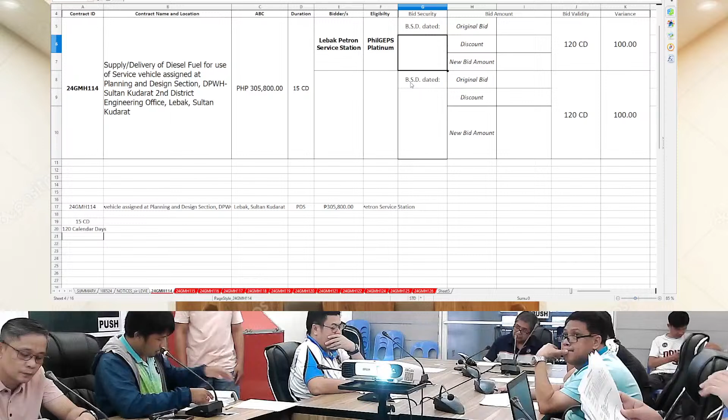Opening the technical component of Lebak Petron Service Station for contract ID number 24GMH114. The documents are: project registration platinum, attached and valid; certificate of registration, attached and valid; DTI, attached and valid; business permit, attached and valid; tax clearance certificate, attached and valid; list of ongoing projects, attached and signed; SLCC, attached and signed; bid securing declaration, dated October 23, 2024, sealed and signed; technical specification, attached and signed; delivery schedule, attached and signed; after sales service reports, attached and signed; omnibus statement, 10 items, sealed and signed; NFCC, attached and signed; audited financial statement, attached and signed.

The technical documents of Lebak Petron Service Station for ID 24GMH114 is... Let's now open the financial component of Lebak Petron Service Station for contract ID number 24GMH114. The documents are: bid form, attached and signed; bill of quantities, attached and signed. Bid amount: 305,000 pesos only. Bid amount: 305,000 pesos only. No discount offered, validity of 120 days.

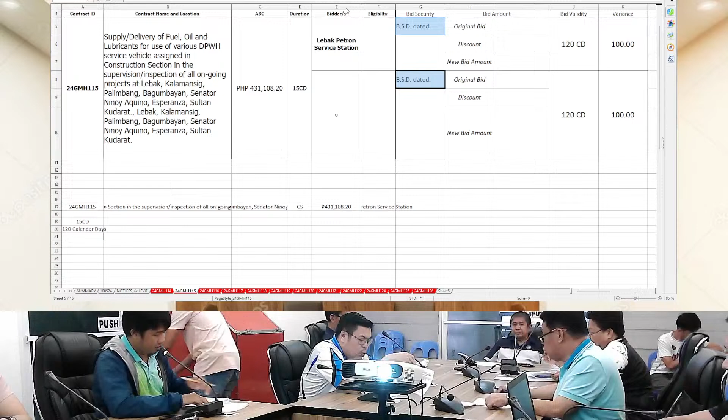Let's now open the documents of Lebak Petron Service Station for contract ID number 24GMH115. The documents are project registration Platinum, attached and valid, certificate of registration, attached and valid, DTI, attached and valid, business permit, attached and valid, tax clearance certificate, attached and valid.

List of ongoing projects, attached and signed. SLCC, attached and signed. Bid securing declaration dated October 23, 2024, attached, sealed and signed. Technical specification, attached and signed. Delivery schedule, attached and signed. After sales service, attached and signed.

Omnibus statement, 10 items, sealed and signed. NFCC, attached and signed. Audited financial statement, attached and signed. Technical documents of Lebak Petron Service Station, contract ID 24GMH115, checklist of tasks.

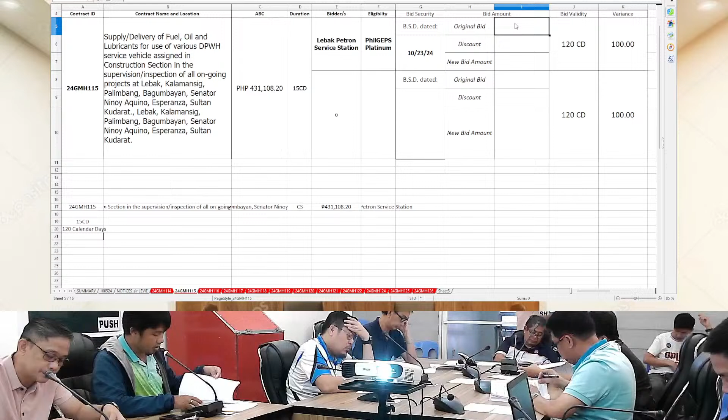Let's now open the financial component of Lebak Petron Service Station for contract ID number 24GMH115. The documents are bid form, attached and signed, and bill of quantities, attached and signed. Bid amount 430,070 pesos only. No discount offered, validity of 120 days.

For the next contract, we have also a lone bidder. Opening the documents, CBC Square Builders for contract ID number 24GMH116. The documents are project registration, Platinum, attached and valid.

SEC, attached and valid. Business permit, attached and valid. Tax clearance certificate, attached and valid. Certificate of registration, attached and valid. SLCC, attached and valid. List of ongoing projects, attached and valid.

Bid securing declaration dated October 23, 2024, sealed and signed. Technical specification, attached and signed. Delivery schedule, attached and signed. Manpower requirements, attached and signed. After sales service, attached and signed.

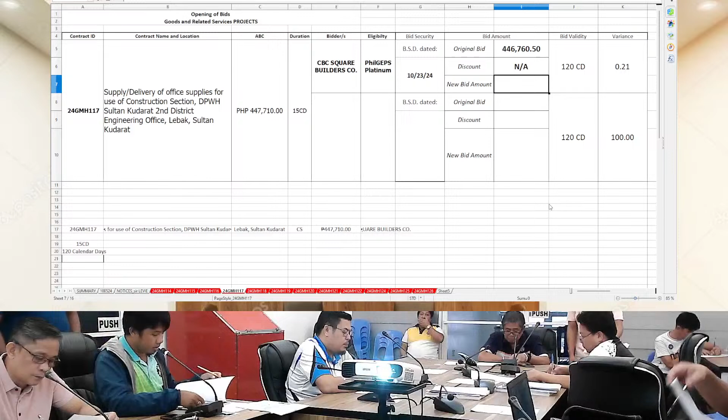Next contract. So we have the technical component of JV Constech for contract ID number 24GMH118. The documents are project registration, Platinum, attached and valid. DTI, attached and valid. Certificate of registration, attached and valid.

Mayor's permit, attached and valid. Tax clearance certificate, attached and valid. List of ongoing projects, attached and signed. SLCC, attached and signed. Bid securing declaration dated October 23, 2024, sealed and signed.

Technical specification, attached and signed. Delivery schedule, attached and signed. After sales service reports, attached and signed. Omnibus statement, 10 items, sealed and signed.

Audited financial statement, attached and duly signed, and NFCC, attached and signed. Technical documents of JV Constech for contract ID 24GMH118, checklist of tasks.

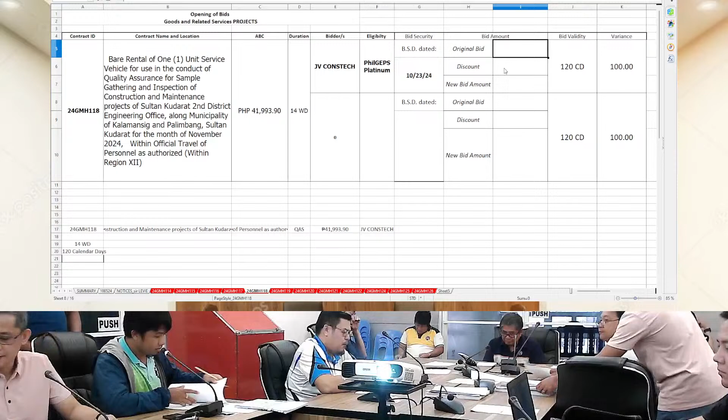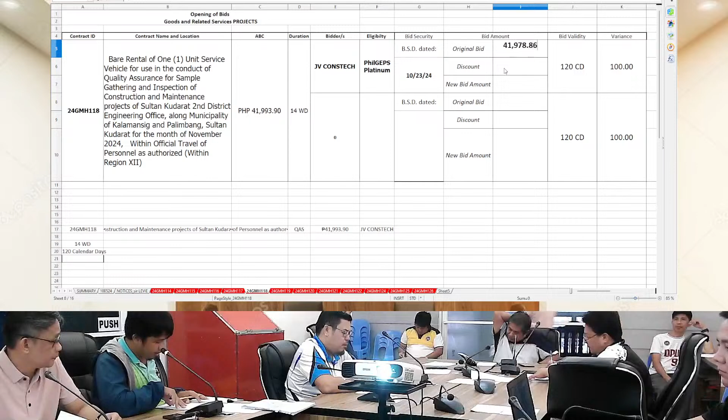Let's now proceed with the financial component of JV Constech for contract ID number 24GMH118. The documents are bid form, attached and signed, bill of quantities, attached and signed, detailed estimates, attached and signed, and cash flow, attached and signed. Bid amount 41,978 pesos and 86 centavos only. No discount offered, validity of 120 days.

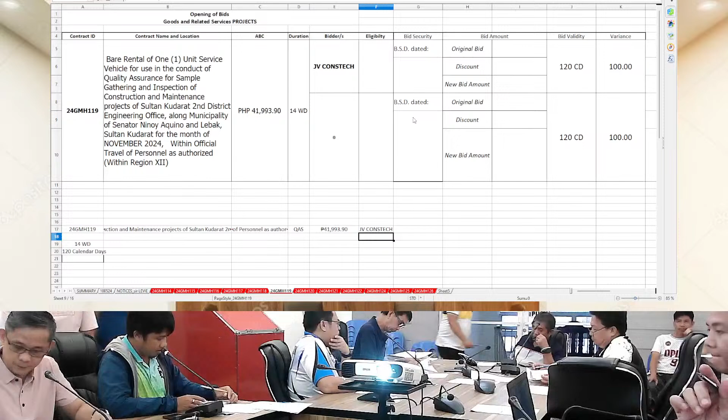Next contract. Opening the technical component of JV Constech for contract ID number 24GMH119. The documents are project registration, Platinum, attached and valid. DTI, attached and valid. Certificate of registration, attached and valid. Mayor's permit, attached and valid. Tax clearance certificate, attached and valid.

List of ongoing projects, attached and signed. SLCC, attached and signed. Bid securing declaration dated October 23, 2024, sealed and signed. Technical specification, attached and signed. Schedule of requirements, attached and signed. Delivery schedule, attached and signed.

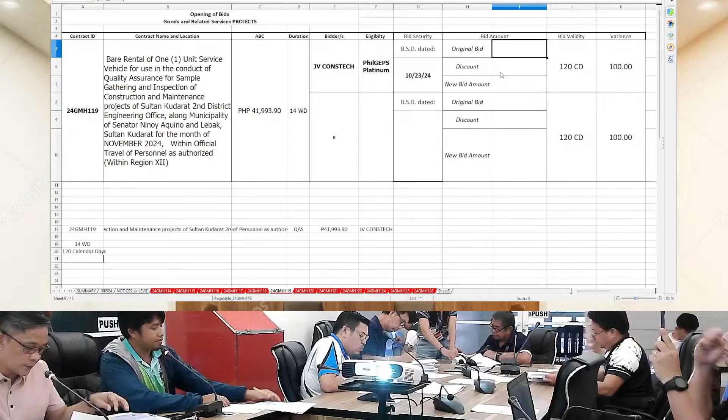After sales service parts, attached and signed. Omnibus statement, 10 items, sealed and signed. Audited financial statement, attached and to be signed, and NFCC, attached and signed. Technical documents of JV Constech for contract ID 24JMH119, checklist of tasks.

Let's now proceed with the financial component of JV Constech for project number 24JMH119. The documents are bid form, attached and signed. Bill of quantities, attached and signed. Detailed estimates, attached and signed, and cash flow, attached and signed.

Bid amount 41,975 pesos and 50 centavos only. No discount offered, validity of 120 days.

Next contract: the technical component of JV CONSTECH for contract ID 24GMH120. The documents are: PhilGEPS registration, Platinum, attached and valid. DTI, attached and valid. Certificate of registration, attached and valid. Mayor's permit, attached and valid. Tax clearance certificate, attached and valid. List of ongoing projects, attached and signed. SLCC, attached and signed. Bid security declaration, dated October 23, 2024, sealed and signed.

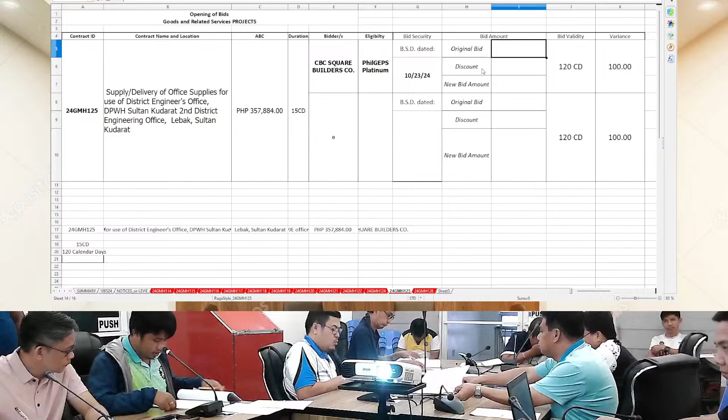For the next contract, we have CBC Square Builders for contract ID 24GMH125. The documents are: PhilGEPS registration, Platinum, attached and valid. SEC, attached and signed. Business permit, attached and valid. Tax clearance certificate, attached and valid. Certificate of registration, attached and signed. List of ongoing projects, attached and signed. SLCC, attached and signed. Bid securing declaration dated October 23, 2024, sealed and signed. Technical specification, attached and signed. Delivery schedule, attached and signed. Manpower requirements, attached and signed. After sales service, attached and signed. Omnibus sworn statement, 10 items, sealed and signed. Audited financial statement, attached and duly signed, NFCC, attached and signed.

The technical documents of CBC Square Builders Corporation for contract ID 24GMH125, as per checklist, pass. Let's continue with the financial component of CBC Square Builders for contract ID 24GMH125. The documents are bid form, attached and signed, and bill of quantities, attached and signed. Bid amount: 357,044 pesos only. No discount offer, validity of 120 days.

For the next contract, we have a lone bidder, CBC Square Builders, for contract ID 24GMH126. DEO procurement: PhilGEPS registration, Platinum, attached and valid. SEC, attached and valid. Business permit, attached and valid. Tax clearance certificate, attached and valid. Certificate of registration, attached and valid. List of ongoing projects, attached and valid. SLCC, attached and valid.

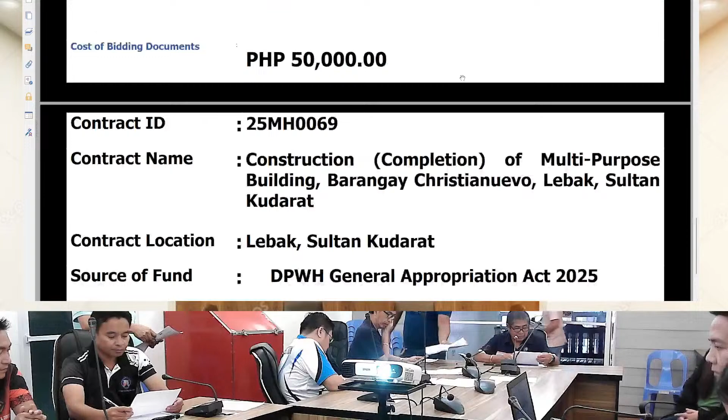Good morning, my fellow workers in the government, as well as our attendees of this pre-bid conference. Today we will be having our pre-bid conference on 3 projects: contract ID 25MH0013, contract ID 25MH0025, and contract ID 25MH0069. These are road widening, construction of riverbank, and completion of multi-purpose building.

So, shall we read the attendance no more? No, we shall now start immediately with the presenter. I will now introduce our presenter from the planning and design section, Engineer Sarah Jean Makasinding and Engineer Winilin Ramuran. So ma'am, please proceed to present this pre-bid conference for these projects.

Thank you and good morning. Sir Assistant District Engineer, Sir David Trabado, Sir Hashri, Sir Boyan, Sir Dong, and to the back members, staff, and to our viewers, good morning. By the way, I'm Engineer Sarah Jane P. Makasinding, and I will be presenting to you the MPB projects.

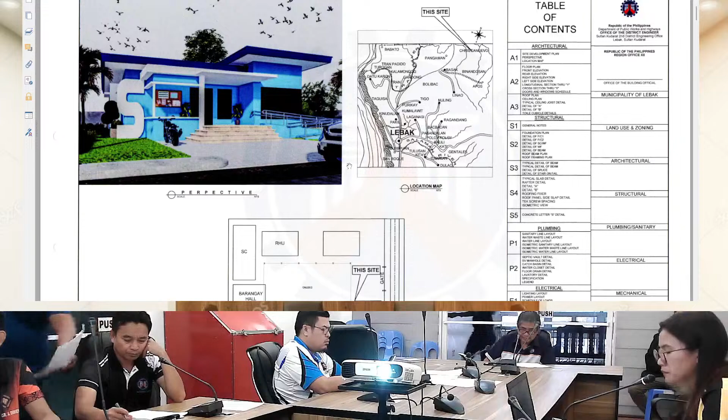With the contract ID 25MH0069, construction completion of multi-purpose building, Barangay Christianuevo, Lebak, Sultan Kudarat, with an ABC of 2,970,000 with a duration of 90 calendar days. This project is a one-story building intended for the SK building.

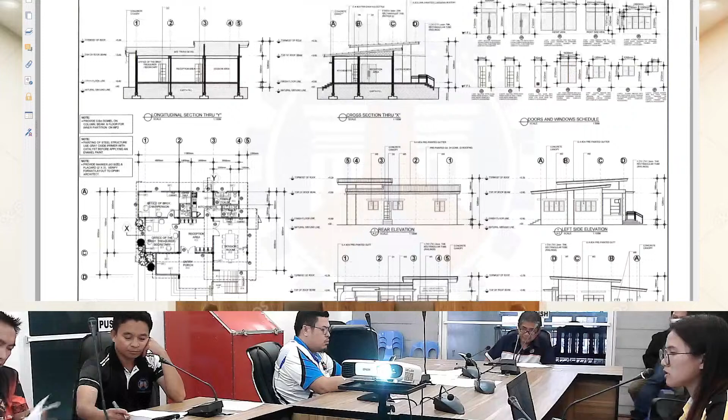For the second page, we have here the perspective view, the location map, and the site development plan of the project. Next, we have here the floor plan, elevations and section elevation, and the detail of doors and windows of the project.

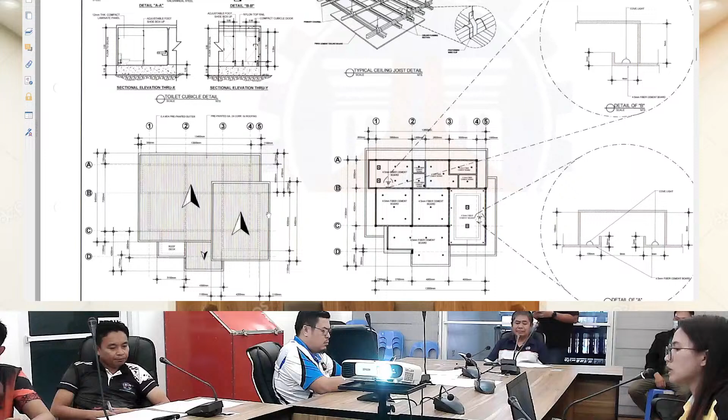This building is 11.8 meters by 9.5 meters. Next, we have the roof plan, the ceiling plan, and the spot detail of the toilet cubicle, spot detail or typical ceiling joist, and the detail of the ceilings. Next, we have the general construction notes for our guidance.

For this page, we have here the foundation plan, the detail of the footing to column, the roof framing plan, and the roof beam plan, together with each section's details and descriptions. Next, we have here the typical detail of our beam, the splice details of our C-purlins and angle bars, and the detail of stair-on fill.

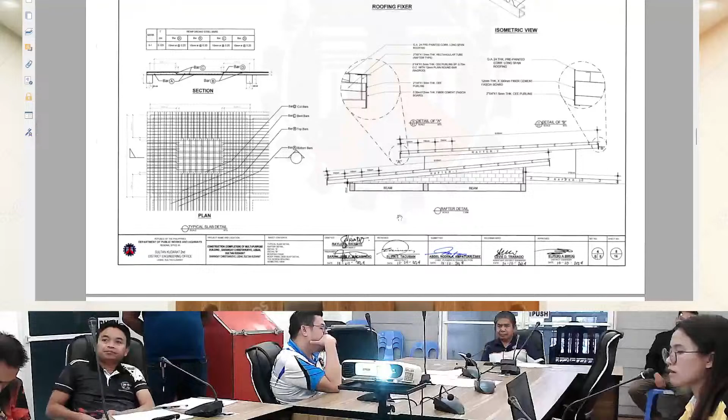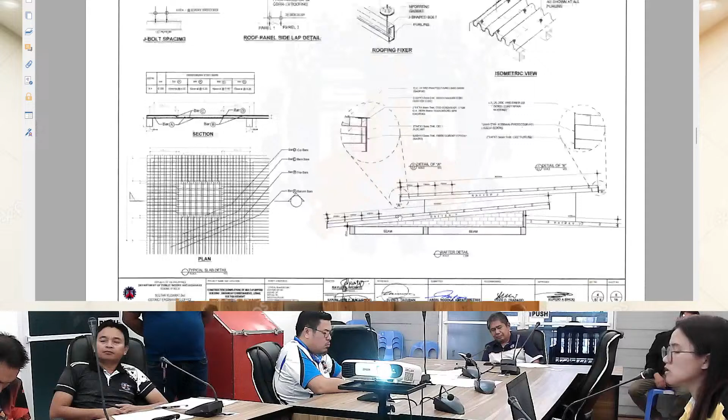Next, we have the typical detail of our slab, and the rafter detail of our roofing, and its spot details for the connections. Next, we have here the detail of our signage. This is a concrete signage here.

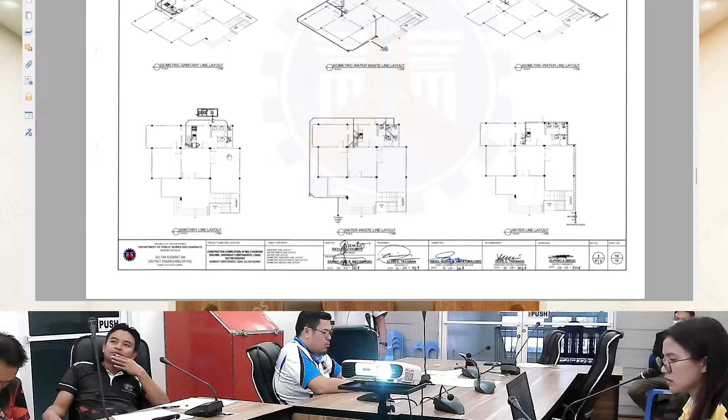Next, we have here the plumbing. For plumbing works, we have here the sanitary, water, and its isometric views.

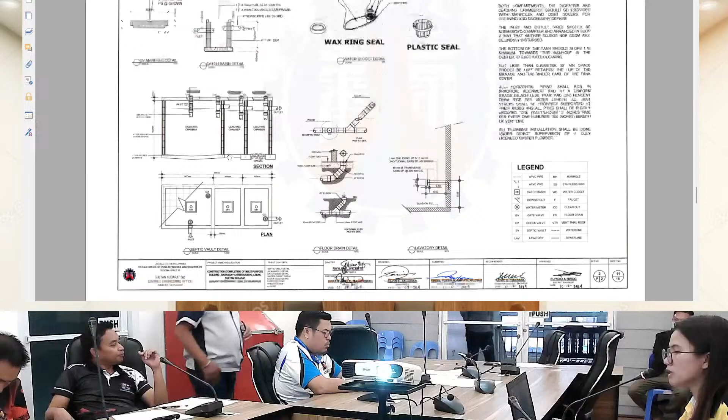For this page, we have the detail of our septic vault, catch basin, and the spot details of the connections of pipelines from vertical to horizontal, and the detail of our lavatory.

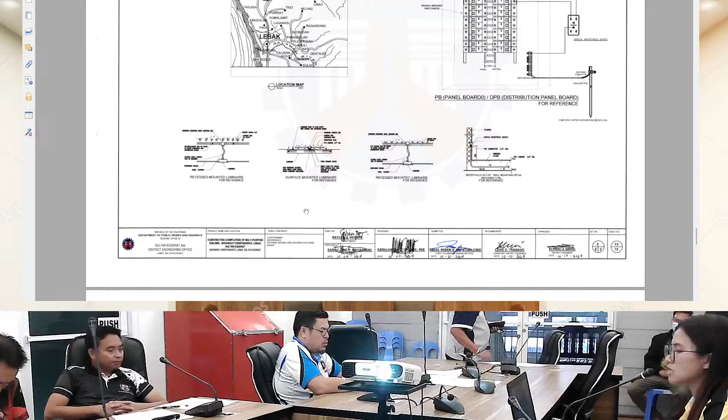Next, for electrical works, we have here the power and lighting layout, the panel diagram, electrical riser and its schedules. We also have here the details for our outlets and lighting for references.

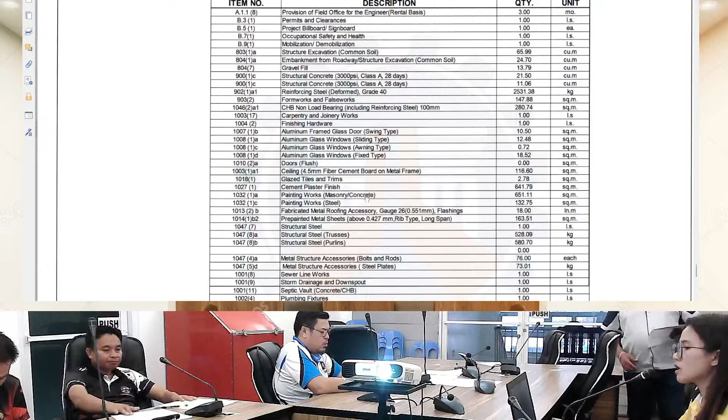For the summary of quantities, we have the provision of field office for the engineers, permits and clearances, project billboard/signboard, occupational safety and health, mobilization and demobilization, structure excavation, common soil, embankment from roadways/structure excavation, gravel fill, structural concrete, reinforcing steel grade 40, formworks and falseworks, CHB including reinforcing steel 100 mm thick.

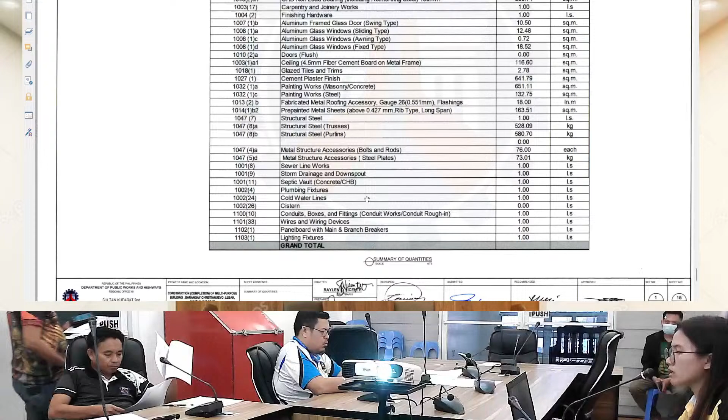Carpentry and joinery works, finishing hardware, aluminum frame glass door, swing type, aluminum glass windows, sliding, awning, and fixed type. We also have doors, which is flush, ceiling, glazed tiles, cement plaster finish, painting works for masonry/concrete.

And for steel, we also have here the fabricated metal roofing accessories, flashings, and pre-painted metal sheets, rib type, long span, structural steel, trusses, and purlins.

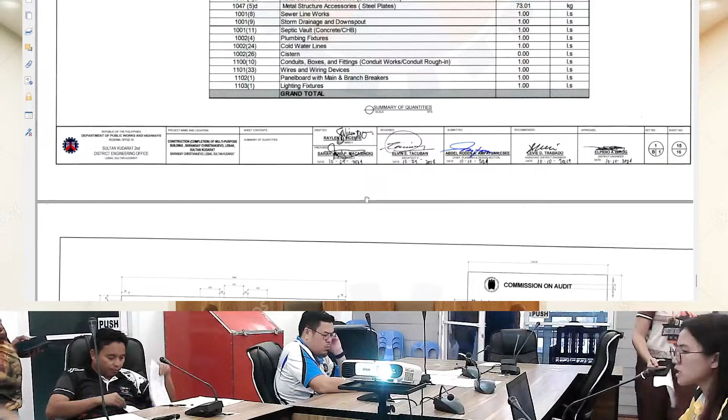And for metal structure accessories, we have here bolts and rods and steel plates. For plumbing works, we have sewer line works, storm drainage and downspout, septic vault, plumbing fixtures, and cold water lines.

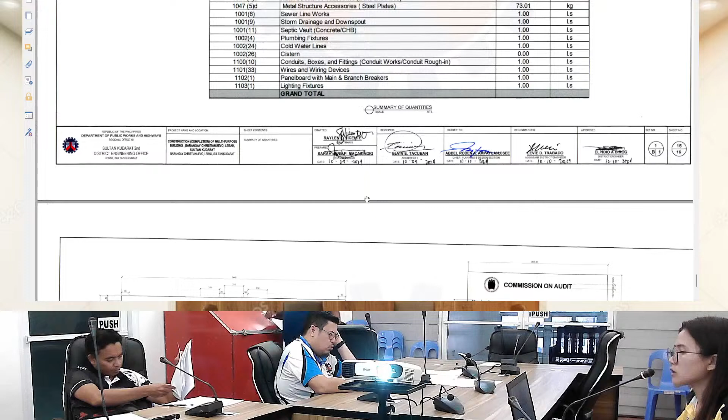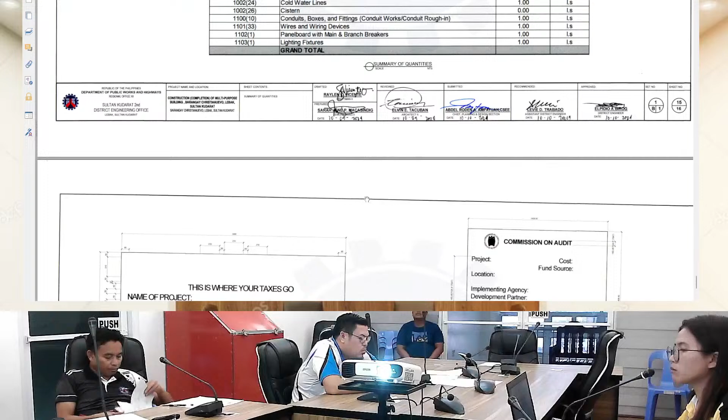For electricals, we have here conduits, boxes and fittings, wires and wiring devices, panel boards with main and branch breakers, and lighting fixtures. And lastly, we have here the project billboard for DPWH and COA.

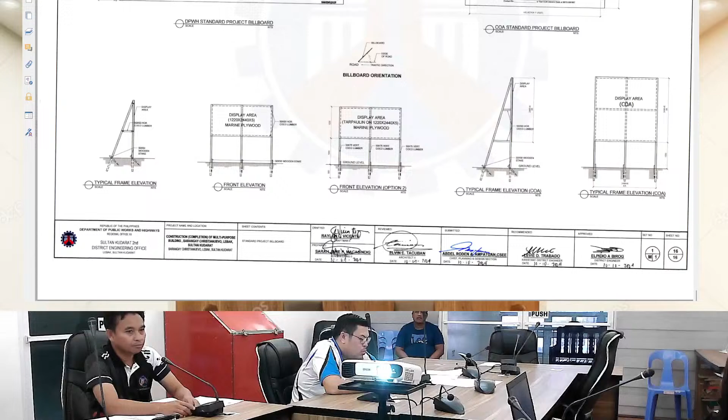I will be presenting contract ID 25MH0013 with the contract name Road Widening, Awang Upi, Lebak, Kalamansig, Palimbang, Sarangani Road, kilometer 1918 plus negative 590 to kilometer 1918 plus 00.

The location of this project will be in Lebak, Sultan Kudarat with the ABC amount of 21,606,060, and we have the duration of 121 calendar days.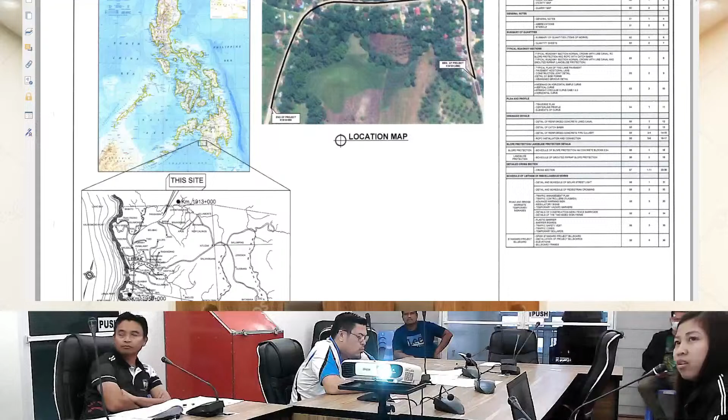Next would be the location map and the table of contents, the general index of this project. So here we can see what is contained in our project, as it is paginated here.

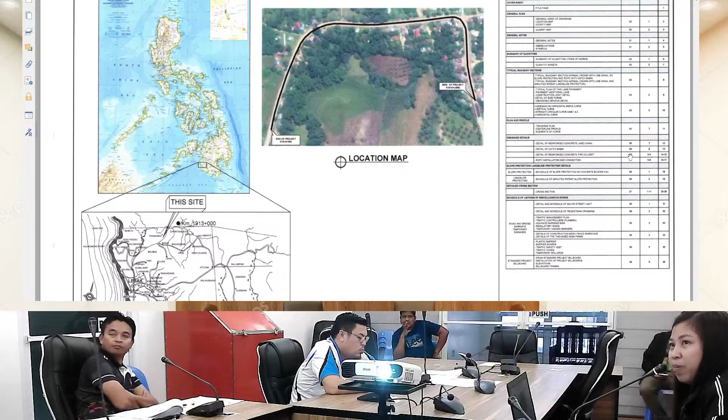So page 2. Next would be the quarry map, general notes, abbreviations and symbols. And on the next page, we have summary of quantities.

In our earthworks, we have clearing and grubbing, 0.40 hectare. Removal of actual structures/obstruction. PCCP unreinforced, 0.15 thick, we have 560 square meters.

Removal of structures/obstruction, concrete, we have 98 cubic meters. Unsuitable excavation, we have 3,776.67 cubic meters. Structure excavation, common soil, we have 620.30 cubic meters.

Embankment from borrow common soil, we have 228.45 cubic meters. Subgrade preparation, common material, we have 5,133 square meters. Our item 200, we have aggregate subbase course, 1,351.10 cubic meters.

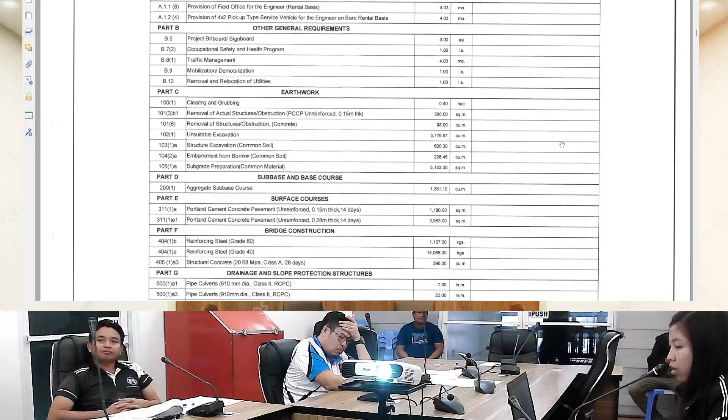In item 311(1)a, Portland Cement Concrete Pavement Unreinforced 0.15 thick, 14 days, we have 1,180 square meters. And for our Portland Cement Concrete Pavement Unreinforced 0.28 thick, 14 days, we have 3,953 square meters.

Our item 404(1)b, reinforcing steel grade 60, we have 1,137 kilograms. Item 404(1)a, reinforcing steel grade 40, we have 15,066 kilograms. Our structural concrete, we have 396 cubic meters.

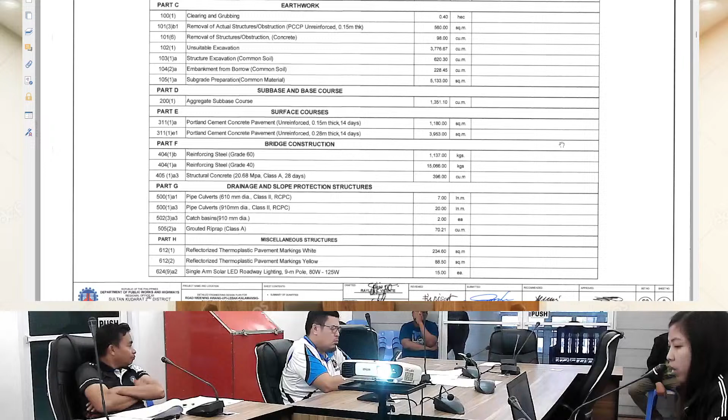For our drainage and slope protections, we have pipe culverts, 610 mm diameter, class 2 RCPC, 7 linear meters. pipe culverts, 910 mm diameter, class 2 RCPC, 20 linear meters.

Catch basin with 910 mm diameter, we have 2. And for our grouted riprap, we have 70.21 cubic meters.

And for the miscellaneous structures, we have reflectorized thermoplastic pavement markings, white, 234.60 square meters. Reflectorized thermoplastic pavement markings, yellow, we have 88.50 square meters.

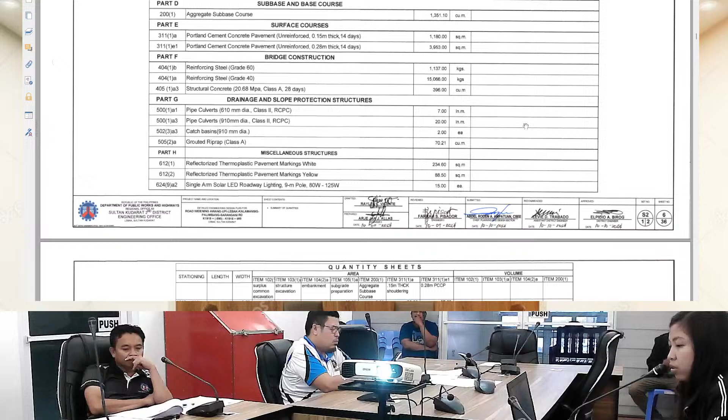And for our single arm solar LED roadway lighting, 9 meter pole, 80 watts to 125 watts, we have 15. Next page would be the quantity sheet.

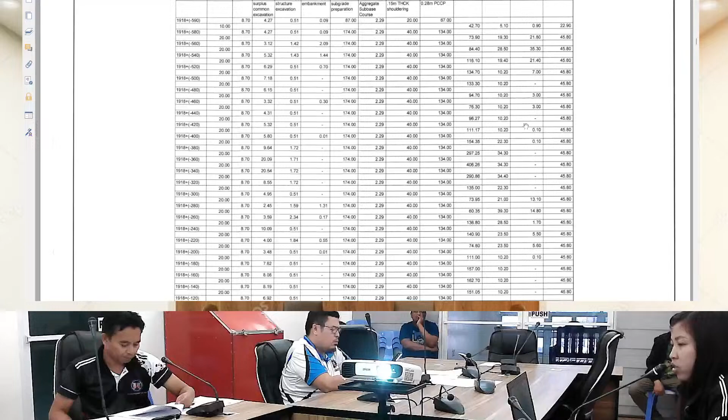So here we can see the quantities per station. Next would be the typical.

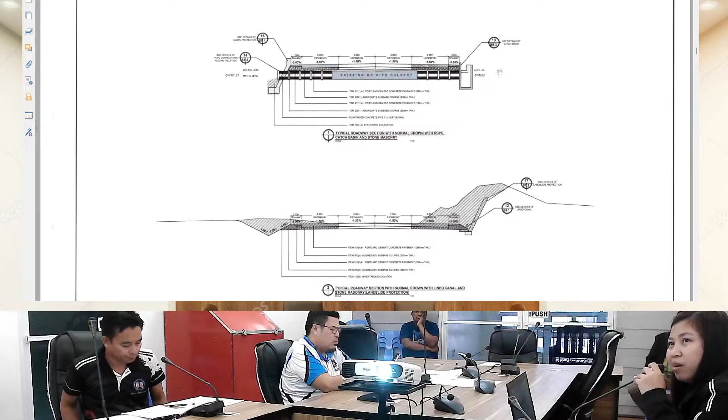So in this page we have a typical plan of extending the RCPC, because it is a widening project, and it has a catch basin and slope protection.

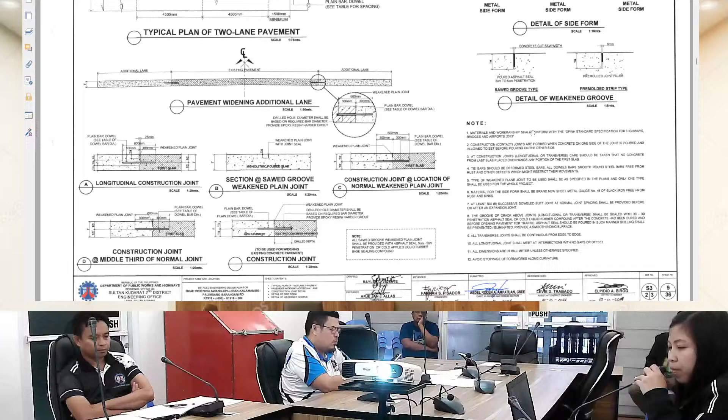Next would be the typical plan of two-lane pavement. So here we can see the jointing and the embankment.

Next would be the detail of our curves. And the next page is the traverse plan of this project.

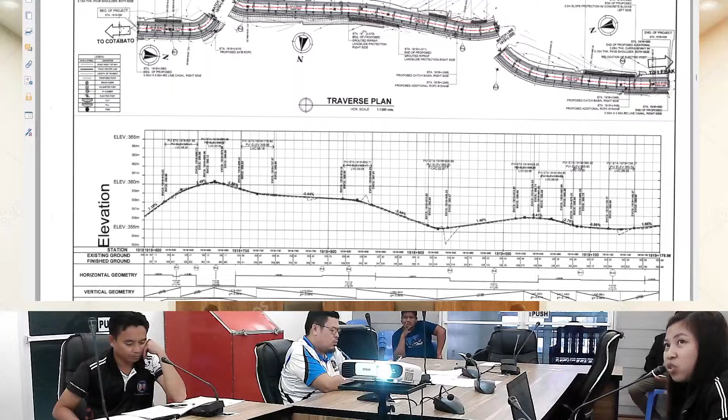So we have this beginning of project, and it indicates here where the structures are located, the location of our RCPC.

Next is the detail of the line canal. And you can see the schedule of our line canal at the left side, upper portion.

Next will be the catch basin, and the detail of our RCPC.

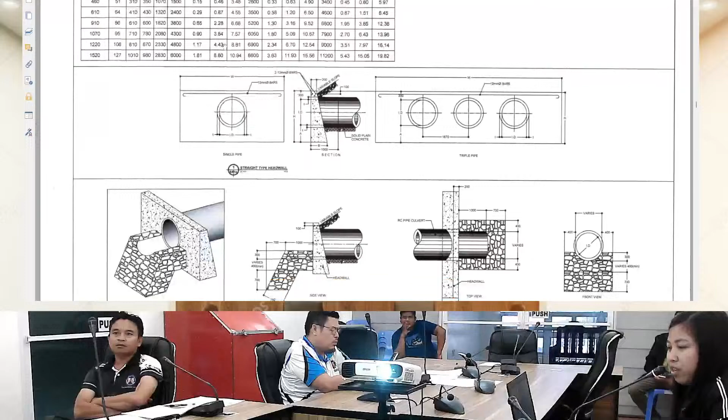Next page will be the jointing of RCPC, the detail.

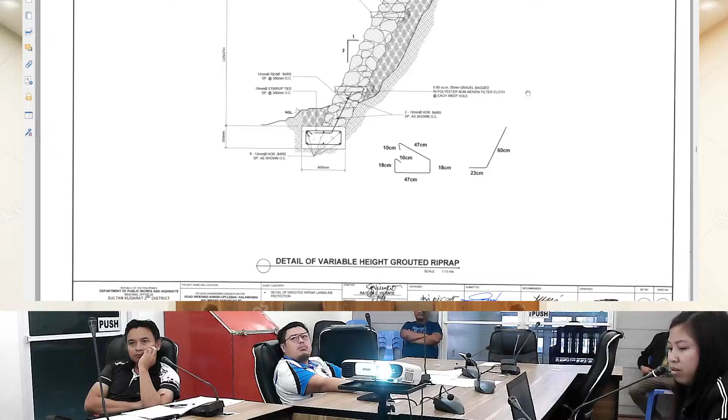Next is the detail of structure of slope protection. It indicates there the stationing, the schedule of our structure, placed on the lower portion of the right side. Next is the detail of grouted riprap.

And next would be the cross-section of this project. So basically it's a widening project. There are portions with slope protection because it's quite deep, and we also have a line canal here, and landslide protection as well.

So ito po yung intersection ng project na ito. Next page po, sa page 31, makikita po natin yung detail ng solar light po natin, solar street light po. Next is the pavement markings po natin.

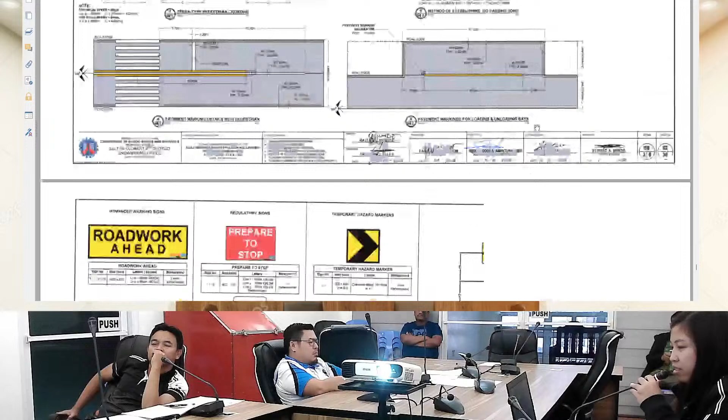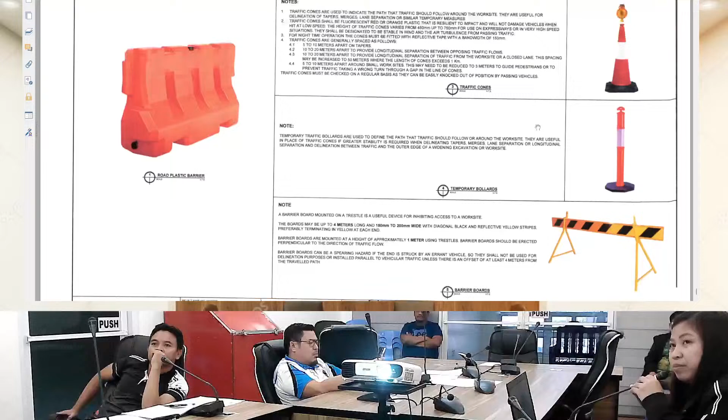Next is the traffic management plan, yung mga warning signs po natin na dapat ilagay sa area. And lastly, nandito po yung billboards, 1 from COA and 2 from DPWH. So that will be all po.

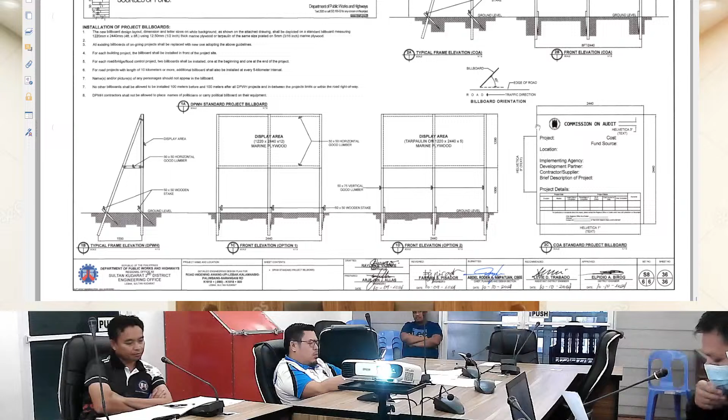Contract name: Construction of Riverbank Protection at Barangay Gapok, Senator Ninoy Aquino, Sultan Kudarat. Contract location: Senator Ninoy Aquino, Sultan Kudarat. Source of fund: DPWH 2025. ABC 106,150,000 pesos. Duration 279 calendar days.

So the purpose of our flood control structures are to design to protect coastal and riverbank areas, including urban and agricultural communities, homes, and other economically valuable areas, and the people located within them. Yan po yung reason kung bakit tayo may mga project na flood control.

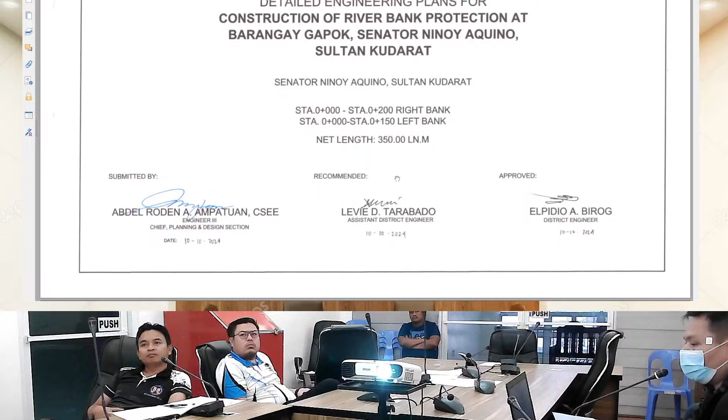The station limit for this project is from station 0 to 200 linear meter at right bank and 0 to 150 at left bank, with a total of 350 linear meter. So ito lang po yung length ng ating project sa Gapok flood control.

For the next page, proceed tayo sa mga pages na kailangan lang nating i-explain. So at page number 6, we have the general plan. As we can see in our projector, nandito po yung Gapok Bridge.

For this side, going ito ng Kulaman or SNA. Supposedly dito po yung going ng Isulan. So nagkabaliktad lang po sila. So itong project natin, ito yung Gapok Bridge, dito yung upstream, dito naman yung downstream. So ang ating project is both side.

Ito yung section 1 na 200 meters. Ito, ang sa kabila naman niya, sa tawid niya is section 2, which is 150 meters. So therefore, ang ating project sa Gapok na flood control is both side. Ayan po, both side po sila. So makikita po natin yan sa cross sections.

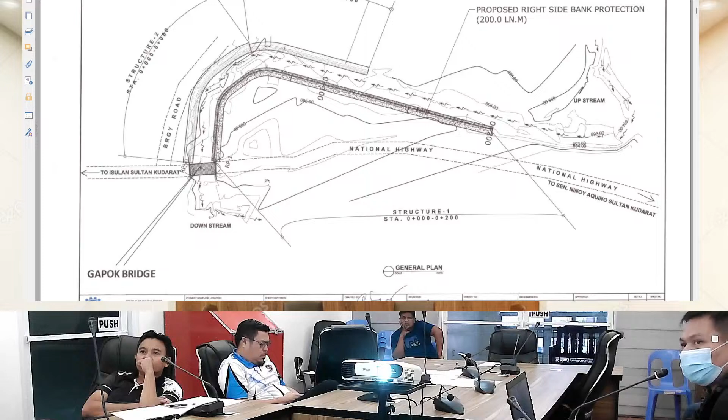So ito po ang kanyang geolocation map. Ito yung Gapok Bridge, so ito yung section 1. Ito naman yung section 2. Proceed tayo sa ibang pages.

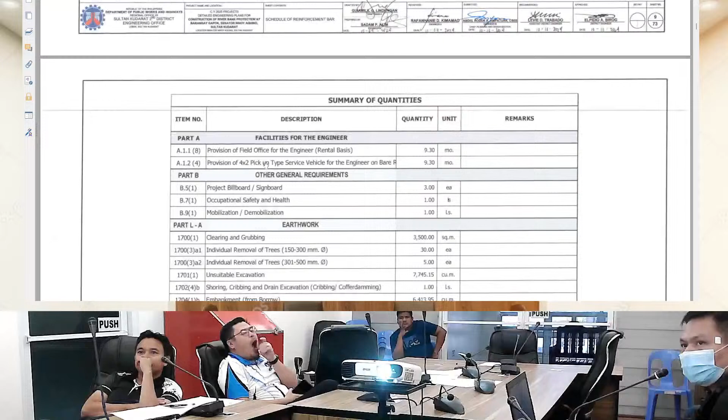For the summary of quantities at pay item in earthworks: clearing and grubbing, we have a quantity of 3,500 square meter. For individual removal of trees, we have 30 each. And for the same item but different in diameter of trees, we have 5 each. For unsuitable excavation, we have 7,745.15 cubic meter. For shoring, cribbing, and drain excavation, we have 1 lump sum.

For embankment from borrow, we have 6,413.95 cubic meter. For concrete slope protection, we have 867.4 cubic meter. For Z-type steel sheet pile, we have 6,825 linear meter.

For item 1718 pipe culverts, we have 15 linear meter. For item reinforcing steel grade 40, we have 467 kilogram. And for item grade 60 naman, na reinforcing steel din, we have 1,365 kilogram. And for structural concrete, we have 17 cubic meter. For trees, furnishing and transplanting, we have 35 each. And for the last item, the solar street light, we have 18 each.

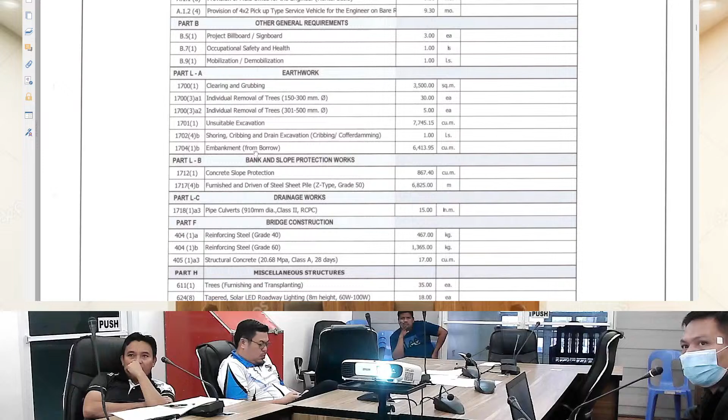So dito pa lang po sa ating summary of quantities, makikita na po natin kung ano yung meron sa ating project. Meron tayong solar light, meron tayong pipe type culvert, and at the same time may removal of unsuitable excavation, embankment, and concrete slope protection. Iyan na yung ating structure.

So proceed tayo sa other page naman, the typical plan of the structure of this project. So ito po yung ating typical plan or structure. Both side po yan. Ito yung sa right side na 200 meters. Ito naman po yung sa left side na 150 meters.

So as we can see, hindi lang po siya medyo maklaro yung grid line. Ito na po yung riverbed. Therefore, mag-channeling po tayo, or let's say dredging or channeling, pero ang naka-indicate dito is channeling or channel excavation. Medyo magkalat tayo ng konti.

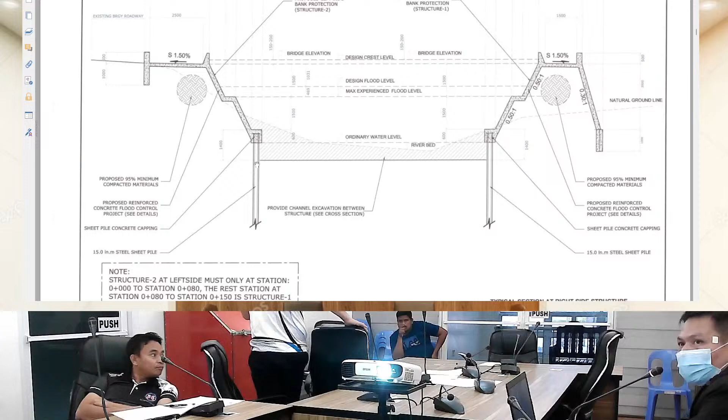Siguro parang from the bottom of capping, 800 mm lang po yan siya. So ayan po, maximum experienced flood based sa actual hanggang dito lang. And then bridge elevation, yung Gapok bridge po, ito po yung elevation ng Gapok bridge. So therefore, yun po yung base natin sa elevation ng ating structure pagka mag-construct tayo.

Kasi isa yan sa mahirap na simula kung ano yung base point ng isang kontrata, ano yung base point ng project. Kasi minsan magpanday na lang sila, pero minsan bumababa yung structure. So yan, meron siyang guide. Bridge elevation, siguro mga 0.2 lang ito, 0.2 lang ang taas ng bridge elevation, bridge slab, and then follow naman yung ating structure.

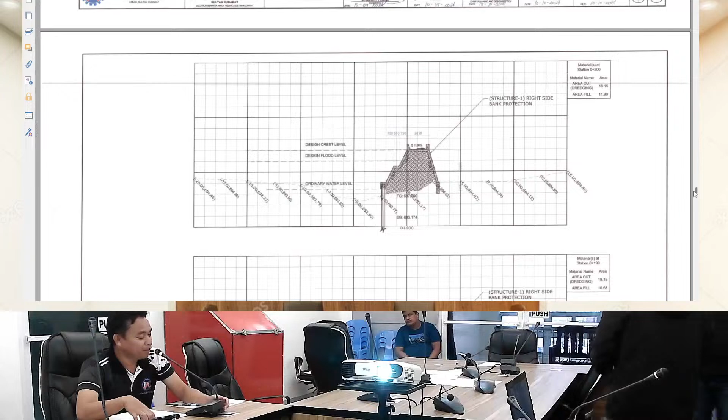At this point, we will now proceed to the next agenda, which is the documents to be submitted by the bidders.

So, very common na po ito na yung isasubmit ni bidder ay dalawang envelope, technical proposal, and financial proposal. Sa technical proposal po is yung technical component envelope ng Class A documents, under which is the legal documents, the valid PhilGEPS registration certificate, it should be platinum, the Securities and Exchange Commission, the DTI, and or CDA, and the mayor's or business permit issued by the city or municipality where the principal place of business of the prospective bidder is located, and tax clearance per EO number 398 series of 2005.

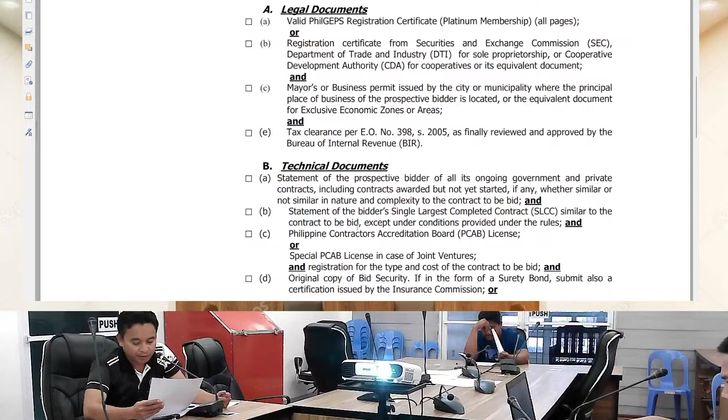Let's continue sa under the technical component envelopes, the technical documents, which includes the statement of the prospective bidder about its ongoing government and private contracts, including contracts awarded but not yet started, if any. Dapat po dinidisclose ni bidder yung kanyang mga all ongoing government and private contracts kasi po part po yun ng computation ng NFCC.

Next is the statement of the bidder's single largest completed contract or the SLCC. It is similar to the contract to be bid. And of course the PCAB license, or in case of joint ventures, yung special PCAB, and then yung joint venture agreement.

And then the original copy of bid security, bid securing declaration ay original and notarized.

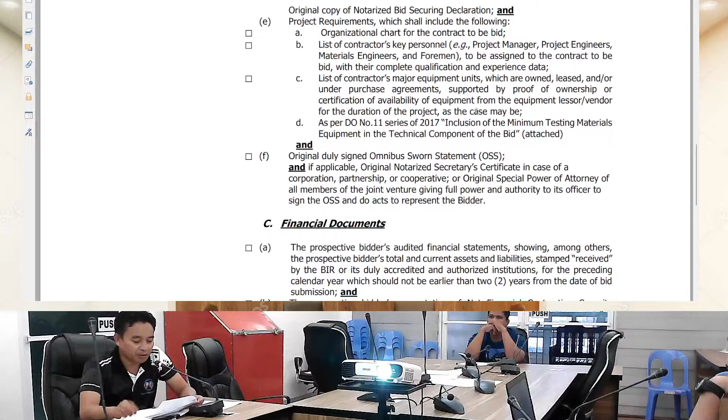Other project requirements which shall include the following. Of course, yung organizational chart, yung list of contractors, key personnel, yung project manager, yung project engineer, yung materials engineers, and the foreman, dapat nakatas po doon yung documents na ito. And make sure na yung mga project manager, yung project engineer, lalo na yung materials engineers, dapat po accredited ng DPWH para po dun sa CWA.

Next is the list of contractors' major equipment units, which kung na list, dapat merong proof of ownership, or kung hindi kilala, dapat merong proof of or certification of availability of equipment from the equipment lessor or vendor for the duration of the project. Tsaka yung as per DO number 11, yung inclusion po ng minimum testing materials equipment and the technical component of the bid. Dapat po yan naka-attach. Pagka hindi present, automatic mag-discount po tayo during the preliminary investigation.

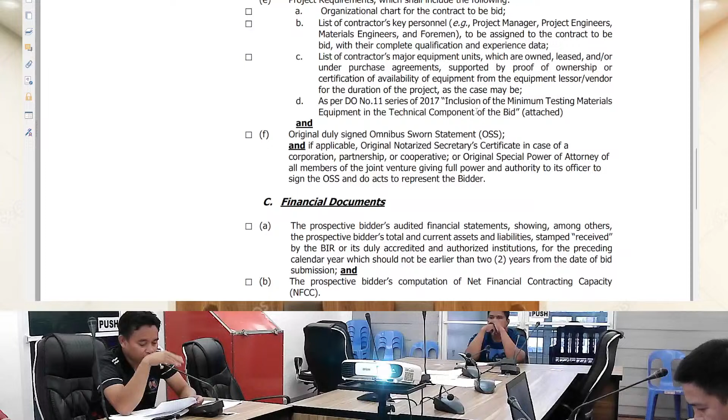And of course, we have the OSS or the dapat original, yung omnibus sworn statement, saka yung new form which is comprising of 10 items.

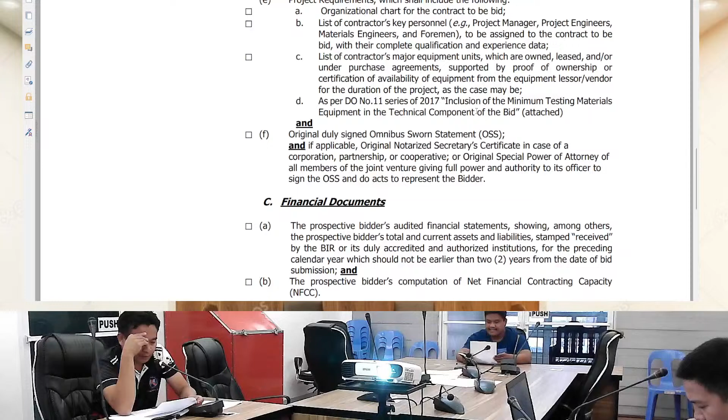And so let's now proceed to the financial documents. Of course, it will include the audited financial statement and prospective bidder's computation of NFCC, the net financial contracting capacity of the bidder. In case of Class B documents, for example joint venture, there should be attached the joint venture agreement, notarized per RA 4566, or a duly notarized statement from all potential joint venture partners stating that they will enter into and abide by the provisions of the JVA in the instance that the bid is successful. So next envelope is the financial proposal.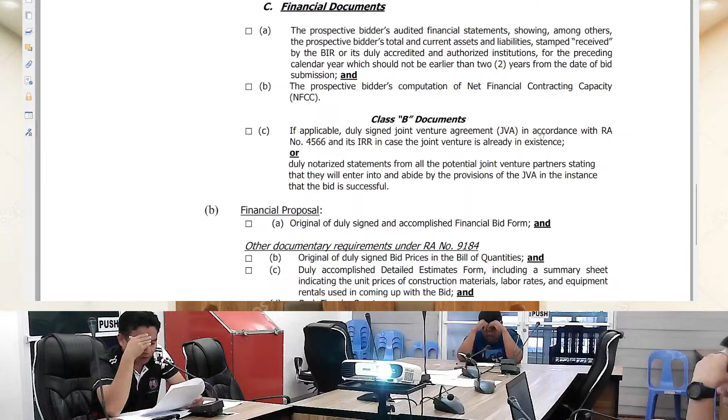Under the financial proposal is the duly signed and accomplished financial bid form, which should be original. Then the accomplished detailed estimates, summary sheet indicating the unit prices of construction materials, labor rates, and equipment rentals used in coming up with the bid. And last, the cash flow by quarter. So that's the content of the financial proposal, item 4.

So please be guided. And again, I'm reminding the team leaders that you should update your eligibility documents at the CWA Central Office so we can expedite our bidding process, especially in the opening of bids, to avoid delays.

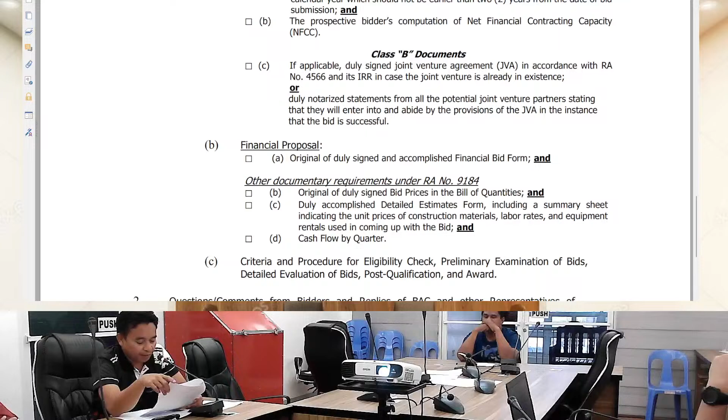And that's it. We will now proceed to the next agenda, which is the criteria and procedure of eligibility check, the preliminary examination of bids, detailed evaluation of bids, post-qualification, and award.

It is understood that the bidders are already familiar with the CWA. So our electronic eligibility check is performed electronically through a system called Civil Works Application. Our bidders are very familiar with the CWA.

Before we conduct eligibility processing, we first conduct contract profiling. During contract profiling, we input into the system the basic contract data — for example, the most important is the contract ID, the contract ID, the contract name, the major work category, the duration, and the ABC. Those are the data we input.